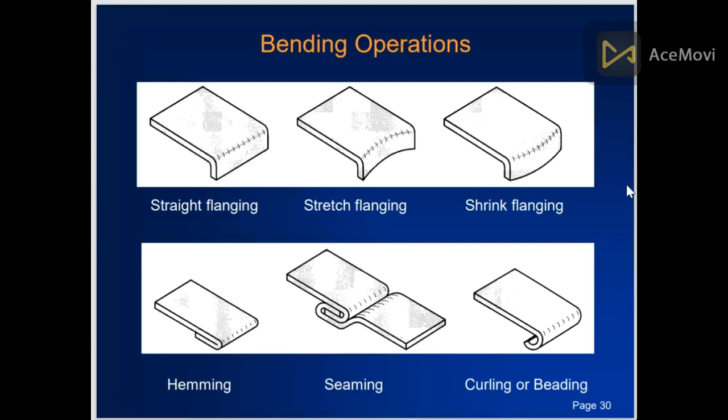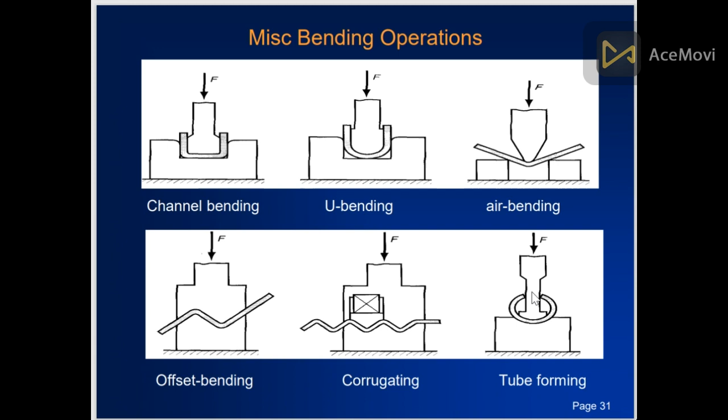Channel bending is also another kind. U bending is when force is applied and the sheet is converted into a U shape. Air bending is like the aerofoil. This is offset bending, this is the shape. Corrugating bending is offset but with multiple offsets. And this is the tube forming process, in which the tube is formed.

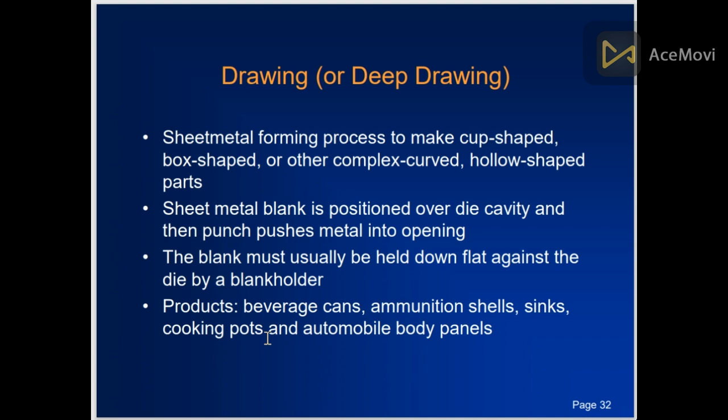Drawing or deep drawing is a sheet metal forming process to make cup-shaped, box-shaped, and other complex curved, hollow-shaped parts. The sheet metal blank is positioned over the die cavity and the punch pushes metal into the opening. The blank must usually be held down flat against the die by a blank holder. Products like beverage cans, ammunition shells, sinks, cooking pots, and automobile body panels are made through this drawing process.

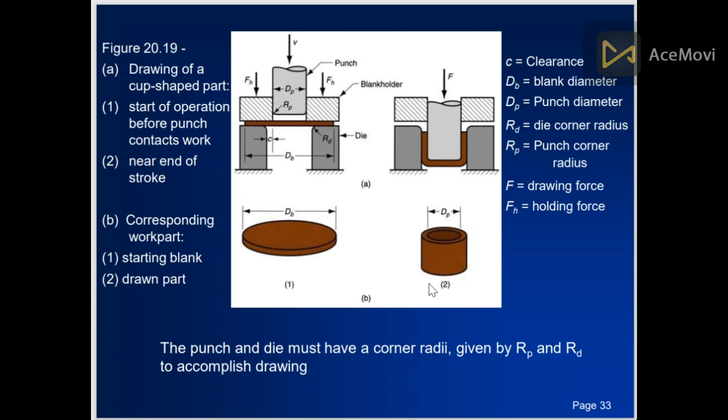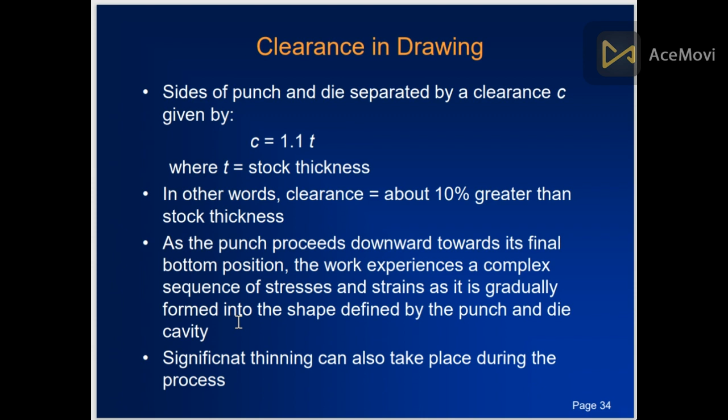Clearance in drawing: the sides of punch and die are separated by a clearance C, given by C equals 1.1 times T, where T is the stock thickness. In other words, clearance is about 10% greater than the stock thickness. As the punch proceeds downward toward its final position, the work experiences a complex sequence of stresses and strains as it is gradually formed into the shape defined by the punch and die cavity. Significant thinning can also take place during the process.

Deformation in deep drawing: the initial step is this, then bending of the edge, then straightening of the walls, then thinning and drawing, and finally the final cup shape.

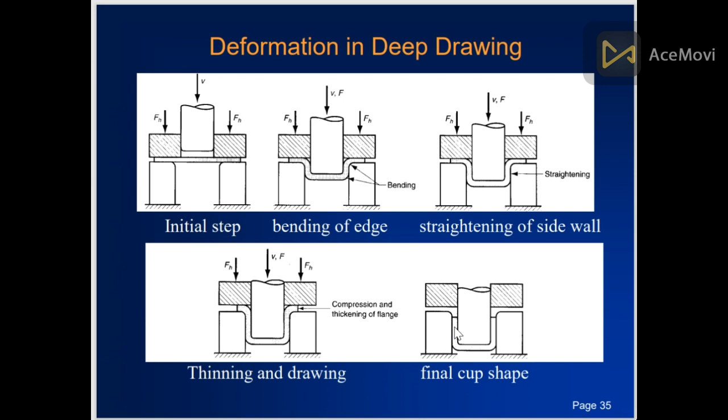Engineering analysis of drawing: the drawing ratio dr is given by dB divided by dP, where dB is the blank diameter and dP is the punch diameter, indicating the severity of a given drawing operation. The upper limit is 2.0, so dr should be less than 2.0. Reduction, defined for the cylindrical shape, is R equals dB minus dP divided by dB. The value of R should be less than 0.50.

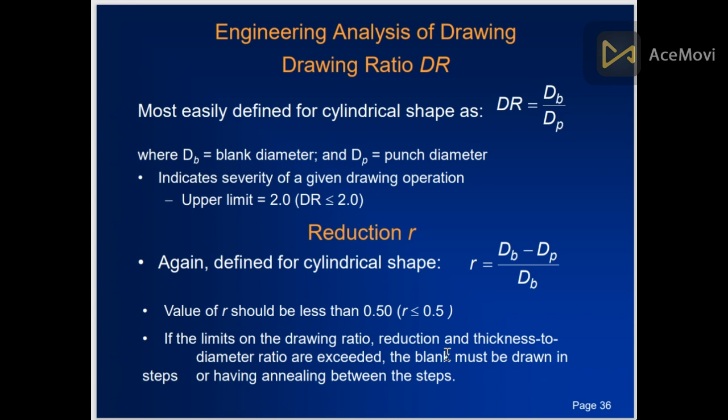If the limits on drawing ratio, reduction, and thickness-to-diameter ratio are exceeded, the blank must be drawn in steps or with annealing between steps. Thickness to diameter ratio is the thickness of the starting blank divided by blank diameter, equal to T divided by dB, where T is the thickness and dB is the blank diameter. It must be greater than 1%. As T divided by dB decreases, the tendency of wrinkling increases.

Drawing force is given by F equals pi times dP times T times TS, times dB divided by dP minus 0.7. This is some kind of formula; you can learn it by yourselves. The maximum occurs at one-third of the stroke.

Holding force Fh is given by Fh equals 0.015 times Y times pi, times dB squared minus dP plus 2.2T plus 2RD squared. Holding pressure may be set at 0.015 of the yield strength, Y being the yield strength, while RD is the die corner radius. The holding force is one-third of the drawing force.

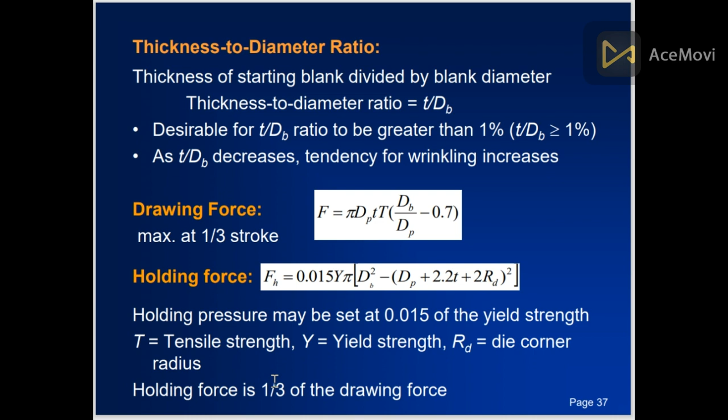Blank size determination is some kind of calculation you can do by yourself.

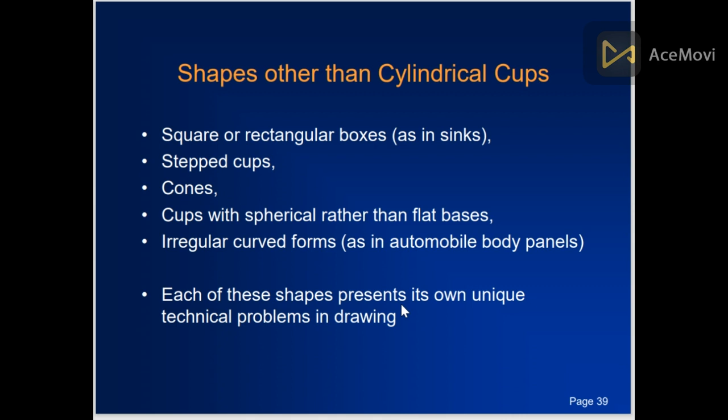Shapes other than cylindrical cups include square or rectangular boxes, stepped cups, cones, cups with spherical rather than flat bases, and irregular curved forms such as automobile body panels. Each of these shapes presents its own unique technical problems in drawing.

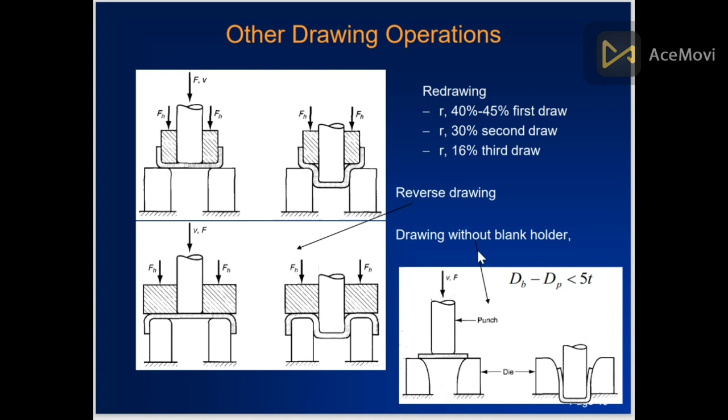This is another drawing operation called redrawing, which can be stepped or reverse drawing, like this type. These are not too important.

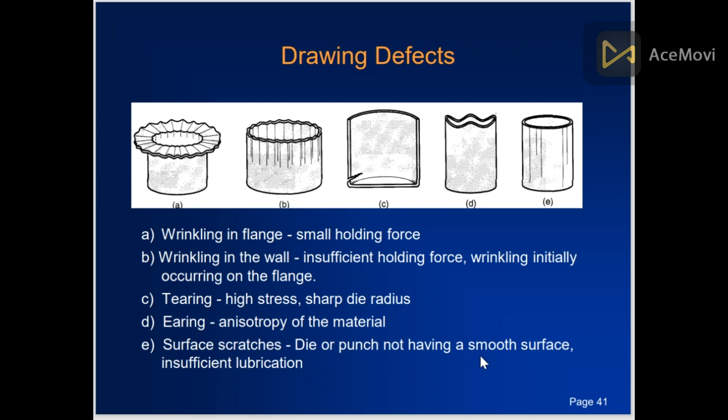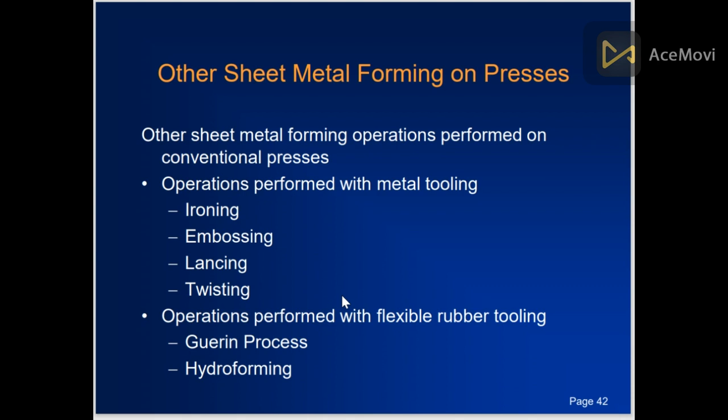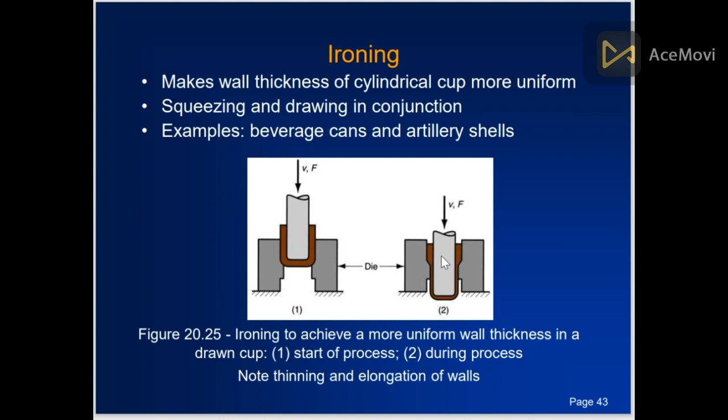Ironing is making the wall thickness of a cylindrical cup more uniform through squeezing and drawing in conjunction, producing a particular shape in the walls. There is a form and shape in the boundary walls of the die, so that the final shape matches expectations. This is known as ironing.

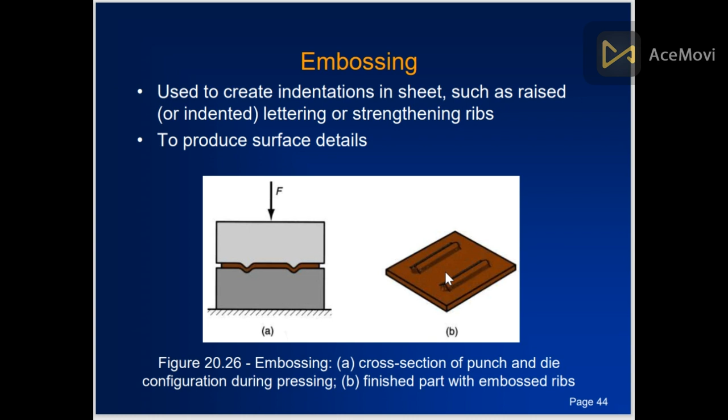Embossing is like printing one shape onto another. The force creates this shape, which can be embossed onto the sheet, such as a print on coins, etc.

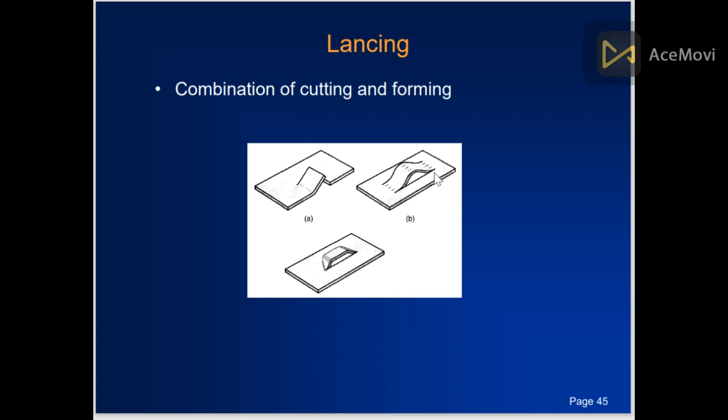Lancing is actually a combination of cutting and forming, so it is known as lancing.

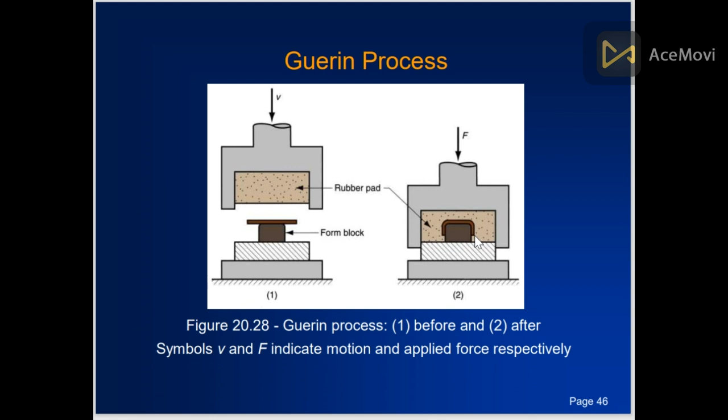In the Guerin process, there is a rubber pad in the punch, and a form block is present, with the sheet placed on the form block. When the die punch is moved onto the sheet, the rubber pad is compressed and the sheet is converted into the desired shape. This is known as the Guerin process.

It has low tooling cost. The form block can be made of wood, plastic, or other material that is easy to shape. The rubber pad can be used with different form blocks. The process is attractive for small quantity production and can be used in small quantities.

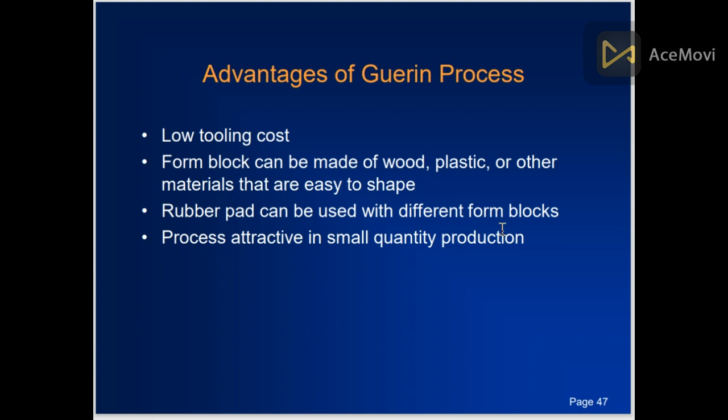Hydroforming is a rubber forming process. The Guerin process uses pressure up to 10 megapascals, while hydroforming has pressure up to 100 megapascals. It can be done under different conditions.

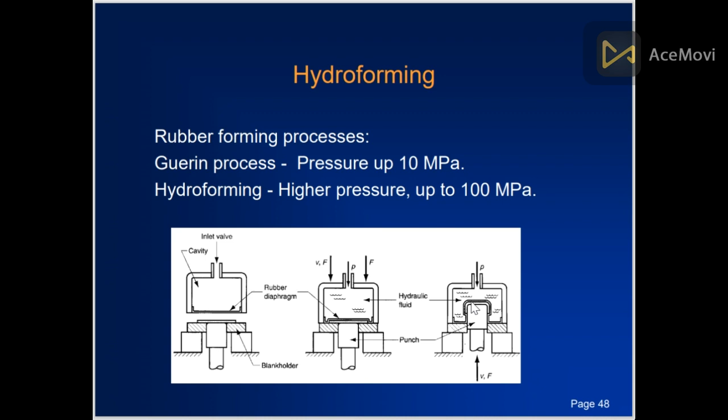Here is the cavity with a rubber diaphragm, which is some kind of thin pad or similar material. In some cases, hydraulic fluid is present inside. Force is applied and the sheet is converted into the desired shape.

Dies for sheet metal processes: most press working operations are performed with conventional punch and die tooling. The tooling is normally referred to as a die, custom designed for a particular part. The term stamping die is sometimes used for high production dies.

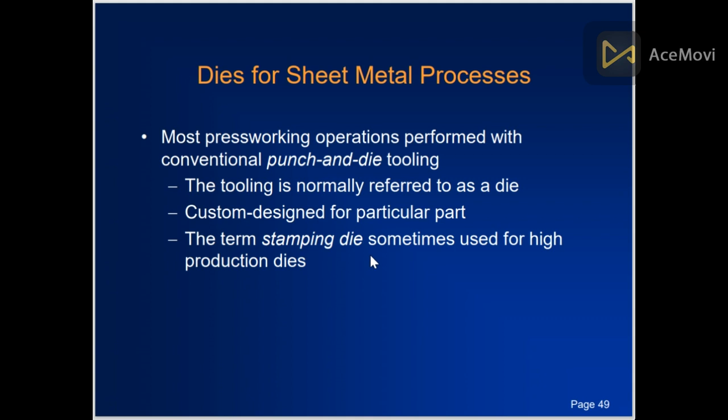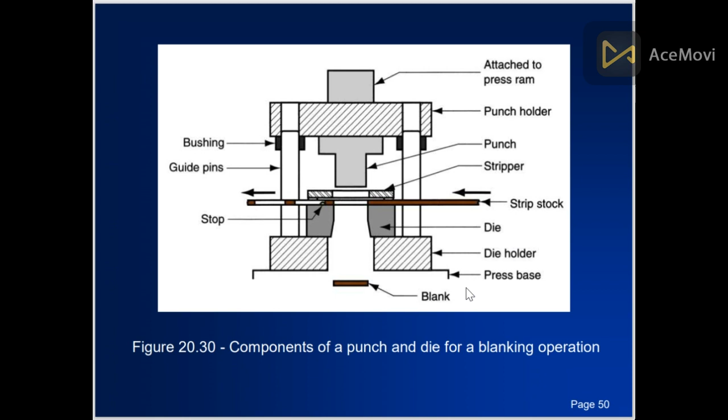These are some components of the punch and die for the blanking operation: attached to the press ram is the punch holder, the punch, and the strip stock. It comes here through the punch, then continues. This is the die, the die holder, and the press base. This is the desired part, the blank.

Sometimes there is a progressive die, which is associated with multiple processes at the same time. In compound dies, two or more operations are performed in a single station, such as blanking and punching to produce a washer. This is a kind of compound die.

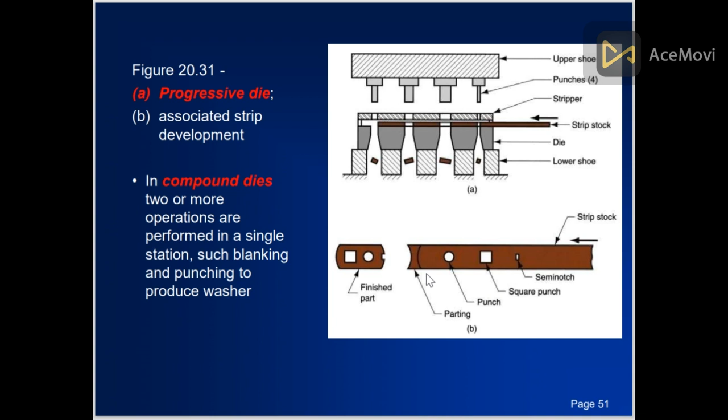What is a press? A press used for sheet metal working is a machine tool with a stationary bed and a powered ram that can be driven toward and away from the bed to perform various cutting and forming operations.

The ram is driven by mechanical or hydraulic power. When a die is mounted on the press, the punch holder is attached to the ram and the die holder is attached to the bolster plate of the press bed. Presses are available in a variety of capacities, forces, production rates, power systems, and frame types.

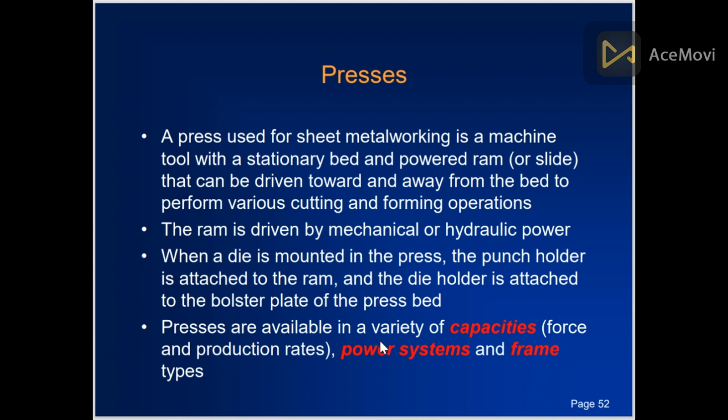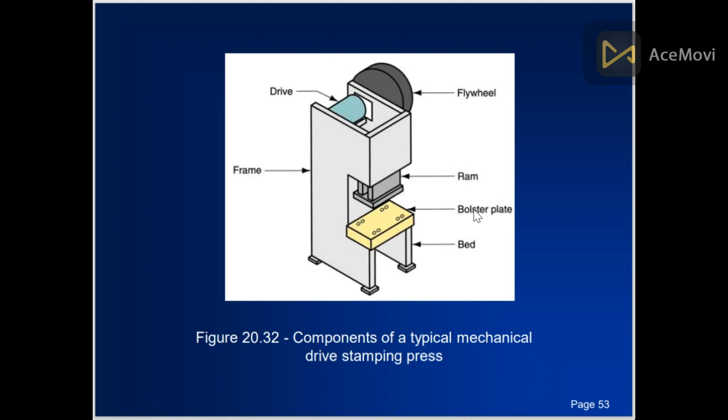These are some components of a typical mechanical drive stamping press: the flywheel, the ram, bolster plate, and bed. This is the frame, a C-like frame, and the drive.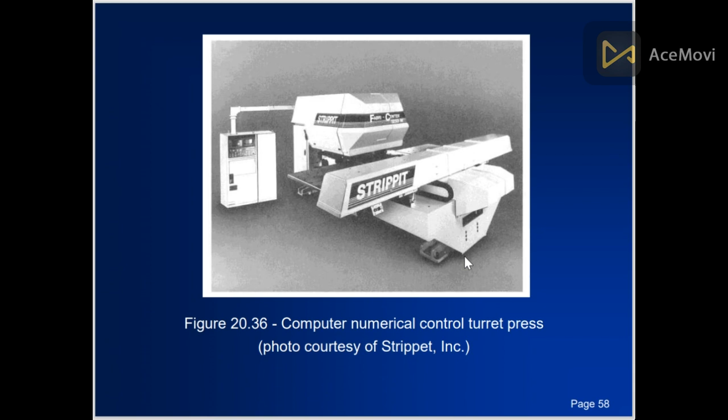This is a CNC turret press with a straight-sided frame press.

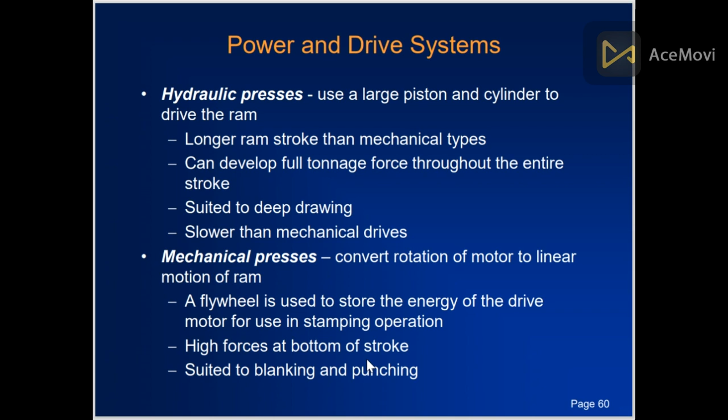A flywheel is used to store the energy of the drive motor for use in stamping operation. This results in high forces at the bottom of the stroke, with high impact, suited to blanking and punching.

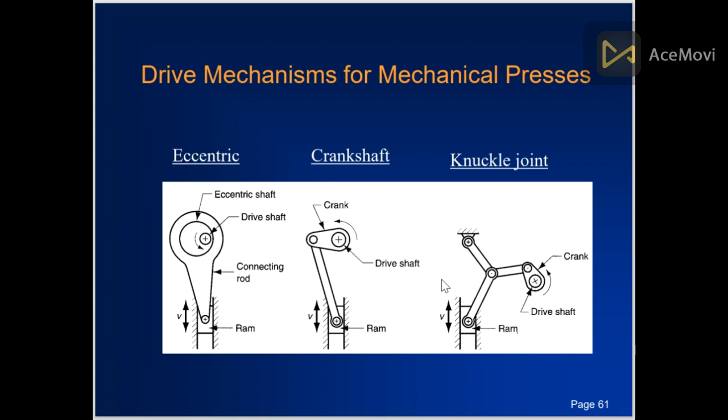The drive mechanism for a mechanical press includes the eccentric shaft, drive shaft, connecting rods, and ram. This is the motion of the ram. There is a crankshaft moving, and the shaft is moving up and down, connected through a knuckle joint, and this is the process.

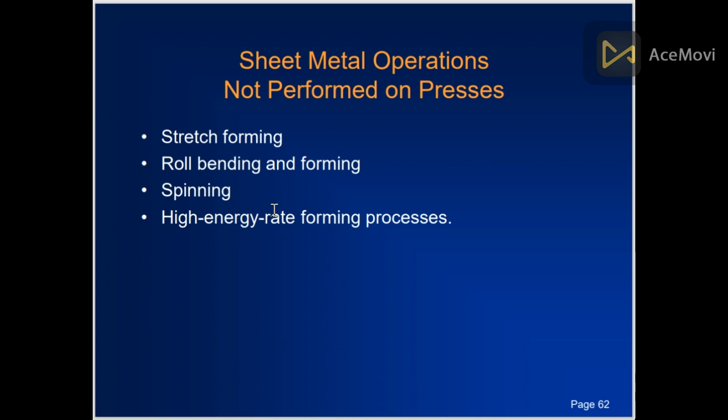Sheet metal operations not performed on the press are stretch forming, roll bending and forming, spinning process, and high energy rate forming process, which we'll discuss later.

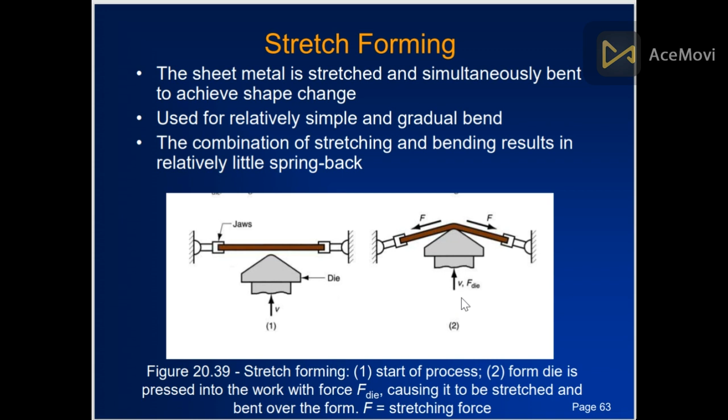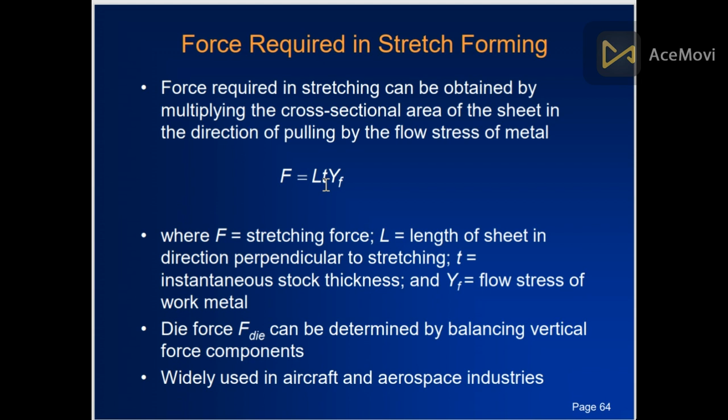F is the stretching force and F-die is the force of the die. The force required in stretch forming is given by F equals L, T, YF, where F is the stretching force, L is the length of sheet in direction perpendicular to stretching, T is the instantaneous stock thickness, and YF is the flow stress of the work metal.

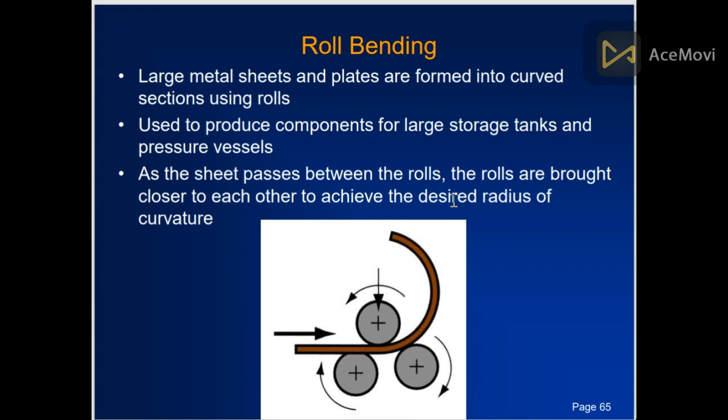This is the process for turning into the desired roll bending shape. As the sheet passes between the rolls, the rolls are brought closer to each other to achieve the desired radius of curvature.

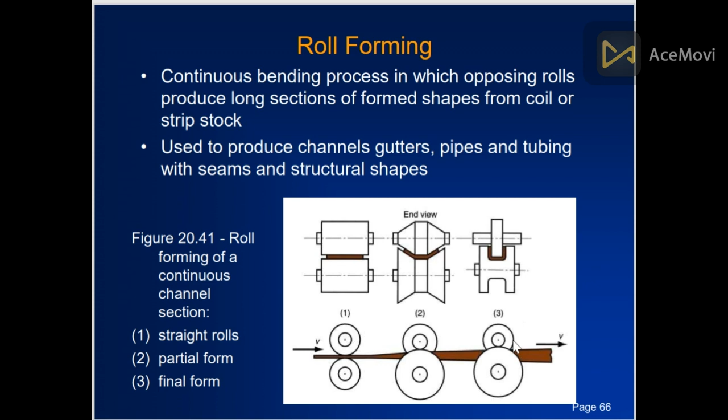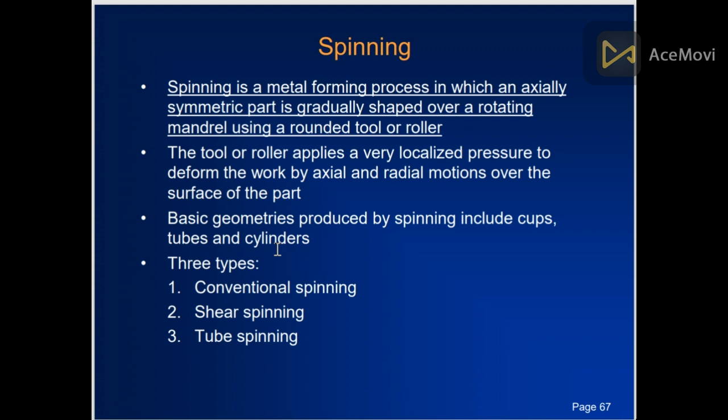There are three types: conventional spinning, shear spinning, and tube spinning. This is the visualization of conventional spinning.

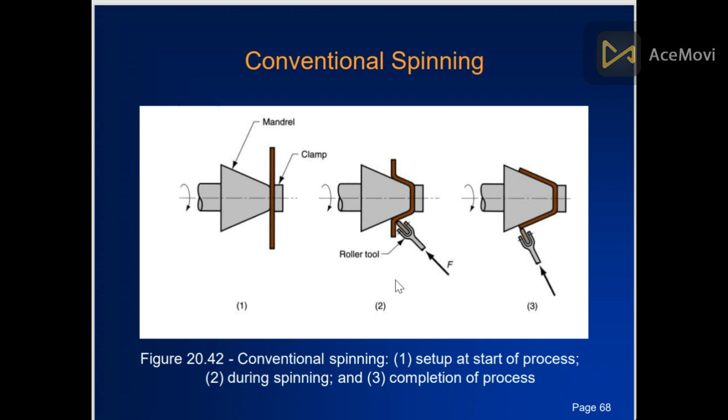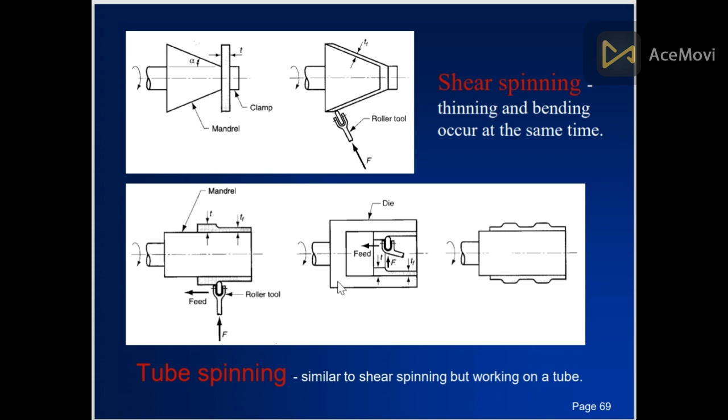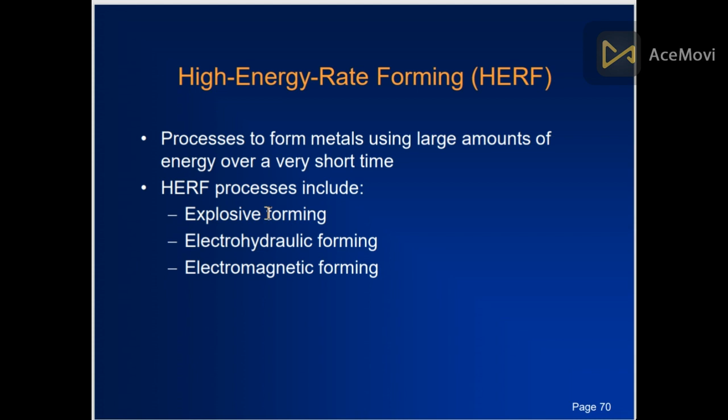High energy rate forming is a process to form metal using a large amount of energy over a very short time. HERF processes include explosive forming, electrohydraulic forming, and electromagnetic forming.

Explosive forming, as is clear from the name, is like blasting. It involves the use of an explosive charge to form the sheet or metal into a cavity. A vacuum is created here, this is the sheet, and this is the explosive charge. When it explodes, this increases the pressure, and the sheet forms into the desired shape like this.